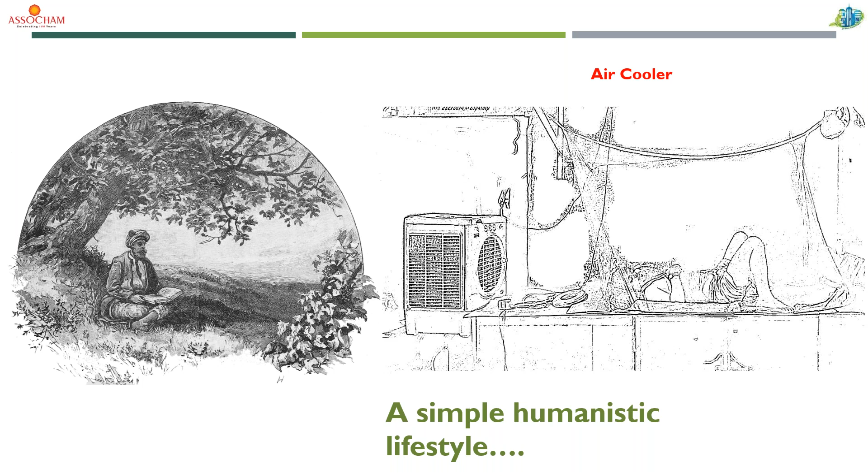We were very close to our nature. We were very close to natural things. But after that, we have now shifted to artificial air conditioners.

We have shifted to air purifiers. Nowadays, air purifiers are very common. Around 10-15 years back, we started installing water purifiers in our homes. Now we have started installing air purifiers at our home.

So this situation is very alarming. And if you talk about the air quality, I mean it was worst. And there were around 10 Indian states amongst the top 100

polluted cities in the world. The top 10 states were from India. So normally the air quality index of Delhi was around 500 plus, but now it has come down to around 50 plus or 60 plus or like that.

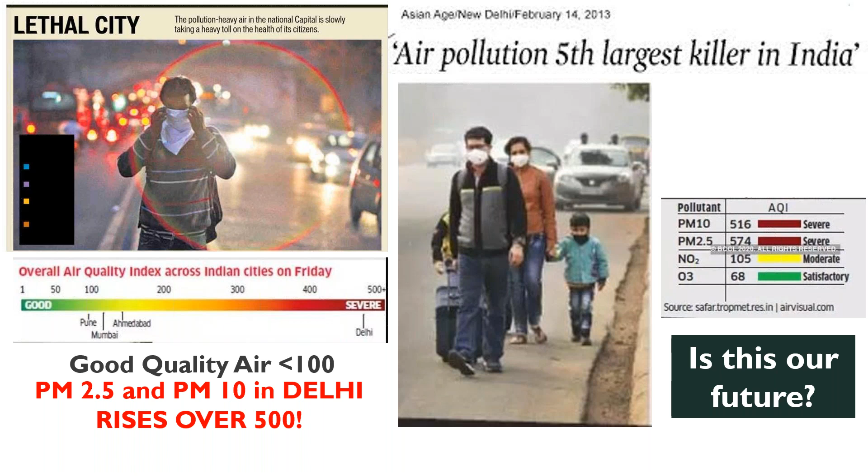The air quality has improved. This shows that air pollution was because of automobiles, construction, and pollution created by industries. Obviously the solution is not to stop industries, transportation, or construction, but to apply a better approach so that our environment is not polluted and we are not destroying our natural resources.

If you can see my screen, these are very routine images of Delhi and a city like Delhi. The roads are jammed in the morning and evening, with huge traffic jams. This is not a very good sign.

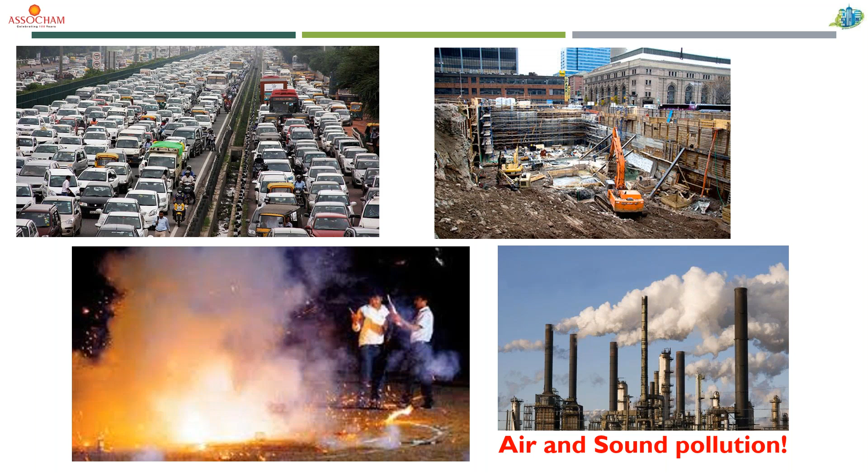You can see the pollution, water pollution - our rivers were very dirty, as I told you. But now after COVID, rivers are very clean. This shows that we were damaging our natural resources.

At ASSOCHAM, we have created this GEM Green Building Certification Program. There were already many programs running in India in the last 18-20 years, and you will be amazed to see that we could register only 6,000 buildings in that time, with around 4,000-5,000 buildings certified green. So ASSOCHAM has launched this program to support the green building movement of India, this GEM Green Building Certification Program.

This program is based upon Bureau of Energy Efficiency ECBC 2017 and National Building Code 2016.

In this GEM Green Building Certification Program, there is a scale of 0 to 135 points. If any project achieves 105 plus points, it will be GEM 5 rated. If it achieves 85 to 104 points, it will be GEM 4 rated, and similarly GEM 3, GEM 2, and GEM 1 rated. Like you have ratings for your electronic equipment, you now have ratings for your buildings also, which is GEM 1 to 5.

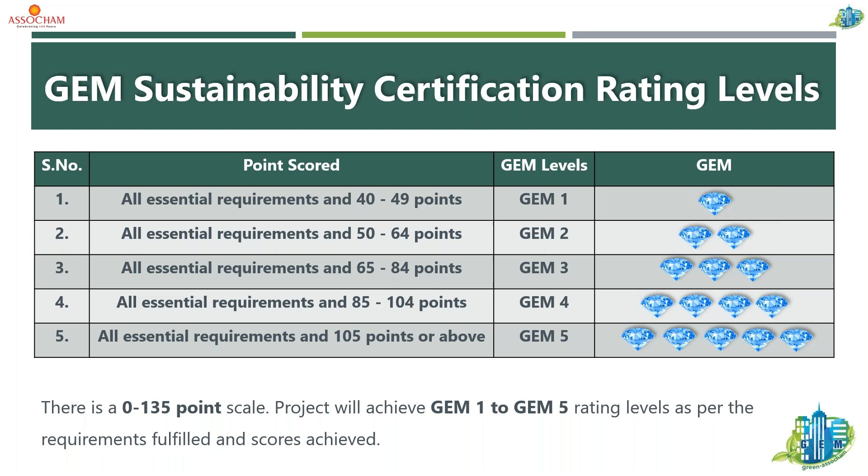This GEM Green Building Certification Program is applicable to all types of construction, all types of developments - housing, urban development, residential, commercial, hotels, factories, universities, colleges, schools and offices.

Now the question is, why GEM when there are other programs also? During this course, I would share with you some 4 or 5 technical credits, and some of you must be certified by other green building certification programs also. So I would like to share how this program has evolved in a different way, how simple it is, so that a layman can understand the green building certification program.

We have kept the fees of this program drastically less, very less, so that everybody can go for green building certification, sustainability certification, and everybody can understand what the program is.

There is a myth that green building certification ratings are very costly, and if you go for green building certification, it will cost you much. So I would like to share with you that no, green building certifications are very, very cheap.

There are many consultants, green building consultants, architects, engineers attending this program, so you can put your questions in the question column. You can see that going for green building certification costs nothing actually - the cost is even less than 4 or 5 rupees per square feet, which is negligible.

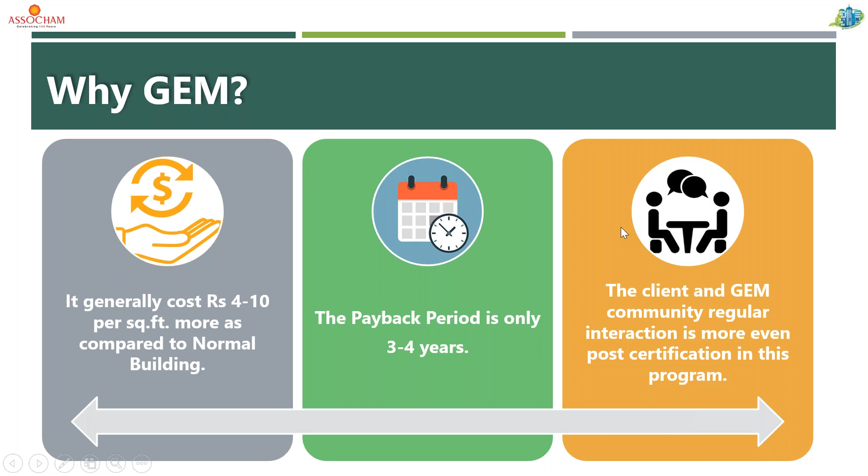One more important thing is that GEM has launched a monitoring platform. For buildings certified by GEM and by other programs also, we are installing the GEM sustainability monitoring platform, and we will monitor their air quality, electricity consumption, water consumption, and fire status online. This monitoring platform has already been launched in many of our projects across India. This is the unique feature which only the GEM Green Building Certification Program has.

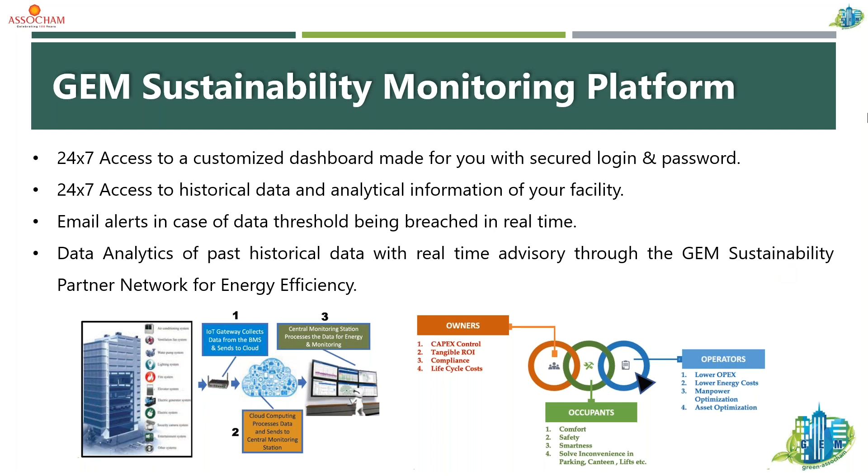Guys, we have got the support from ISHRAE, as I told you. We have got the support from Fire and Security Associations of India, from the Indoor Air Quality Association, and from the ASHRAE India chapter.

We have got support from Smart Habitat Foundation, GSES, and many other such organizations. They are supporting us in our movement, and with their help we have done approximately 35 plus green building certification projects in the last 2 years. There are 500 plus green building certified GEM professionals associated with us, along with many other professionals. I am thankful to all.

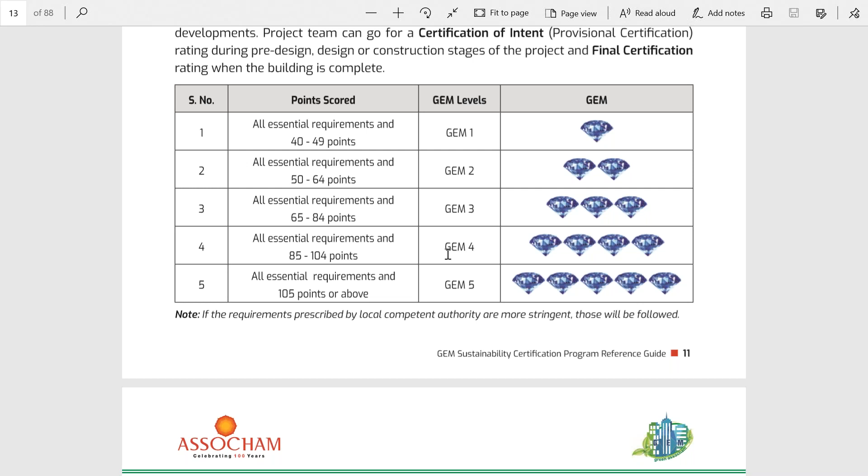Friends, I would like to share with you, as I told you, GEM is the only green building certification program which has a GEM monitoring platform with it. So we are monitoring live - the buildings rated by GEM, and also buildings rated by other programs. We are monitoring their electrical consumption, water consumption, fire and life safety status, and air quality status.

Now, I would like to share with you that GEM is the only program which has included fire and life safety in its criteria. No other programs talk about fire and life safety, but we do, because we have seen many fire incidents in many green buildings. So when we talk about energy conservation, water conservation, efficiencies, and human comfort, I think safety of life comes before energy efficiency, water efficiency, or human comfort. So we have included fire and life safety also in the sustainable buildings.

We have also included passive design strategies in our program. Why? Because if a building is properly designed and designed in an efficient way, we can reduce the consumption of electricity, lighting, and water by 30 to 40%. So it is always good to design a good building, a best building. Passive design architecture plays a very important role, and so do the architects. So we have included passive design strategies also in our program.

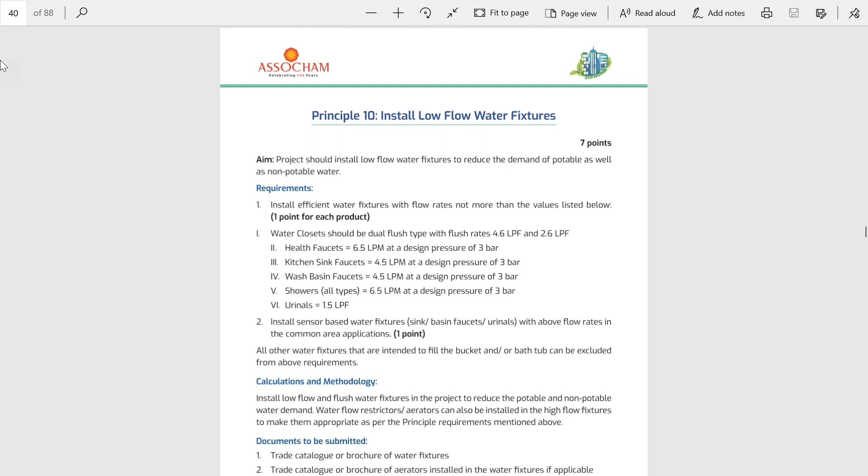Now I would like to explain the difference, how simple we have designed this program. Guys, you must know that if we want to reduce potable water consumption, we have to install low flow water fixtures. So what we have done is awarded buildings points on the basis that if they install low flow water fixtures, we are allowing them the points. There is no need to do any kind of calculation. You need not perform any calculation to show the water saving. If you are installing low flow water fixtures, you are saving water. So there is no need for calculation, and we will award 1 point for every installation.

Say if you are installing health faucet, low flow kitchen faucets, wash basin faucet, shower and urinals, you will be awarded 1 point each. And if you are installing sensor based water fixtures, you will be given 1 more point. So if you are installing low flow water fixtures, you will be awarded points. You will just have to share the water bills, fixture purchase bills, and show the photographs. That's it. There is no need to do any calculation or saving calculation on the calculator, because what we understand is worthless.

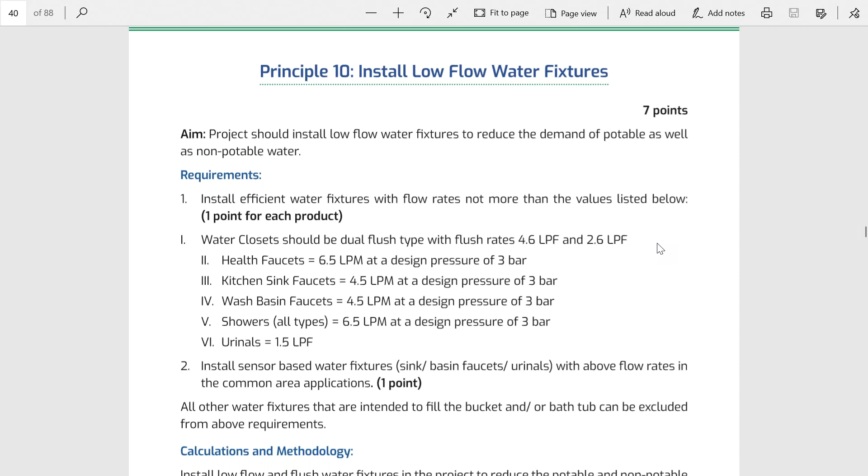Similarly, I will take you to the next point. I hope you all are getting this. You will be allowed to ask questions at the end, or you can send your questions through email also. Now we are moving to our next principle, which is again very important, and what GEM has done to improve this principle.

I am waiting for the screen to come to you. I think now you can see the next screen, which is principle 11, on-site treatment of grey and black water, reuse for flushing.

Friends, you all know that some grey water and some black water comes out from our toilets and kitchens as well. And for a building to save water, we recommend installing sewage treatment plants. And if it is industry, we recommend installing ETPs to treat the water. Then this treated water is reused for flushing, landscaping, car wash, cleaning and all.

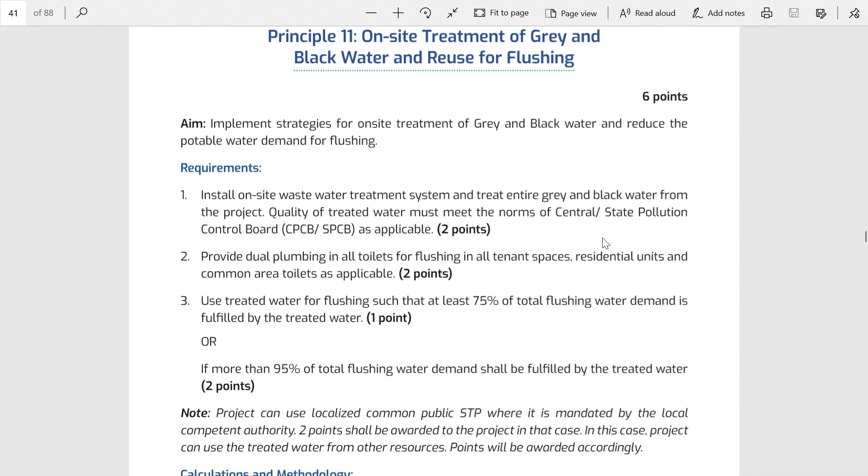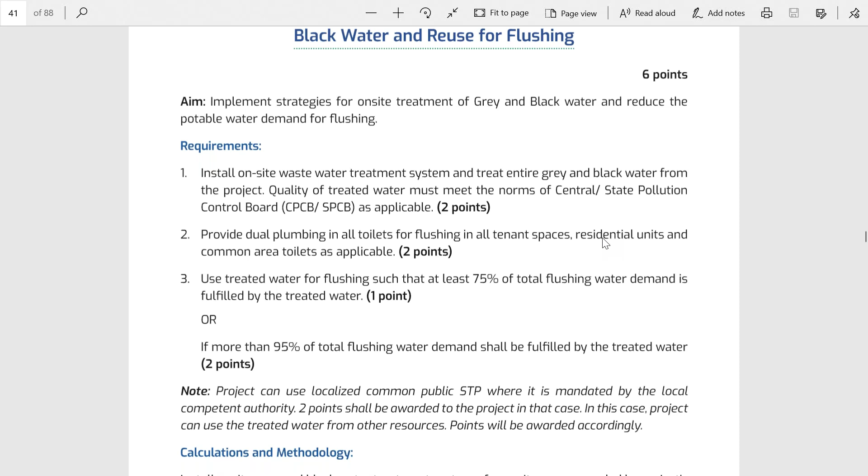We also award points for installing STPs, installing dual plumbing in the toilets, using the treated water for flushing. That's great. But the major change is, I am highlighting this on my screen, and you can see in a couple of minutes. If you read the highlighted section, you can see that if you talk about industrial areas, there are many industrial areas where the size of the industries and the plots are very small.

In such plots, the industries are not supposed to install their individual STPs. In that case, the government prepares an STP for them in a common area, and the discharge from all the facilities comes to that common STP. So if such is the case, ASSOCHAM GEM awards 2 points to the industries if they do not have space to install the STP, or they are not supposed to install the STP by the local authorities. If they are supplying their sewage waste to the common STP installed by government, and they can confirm this, we will award them the points.

This is again a major change in the green building certification programs, because earlier many industries were struggling as they were not allowed to achieve points. If this was the case, they were forced to install the STP in their own boundary only. But we have allowed them - if they are using a common STP, we will be awarding them the points.

Now I would like to take you to the next principle, which is principle 14. Just a minute. See, this is post-occupancy waste management. I am waiting for the screen to come.

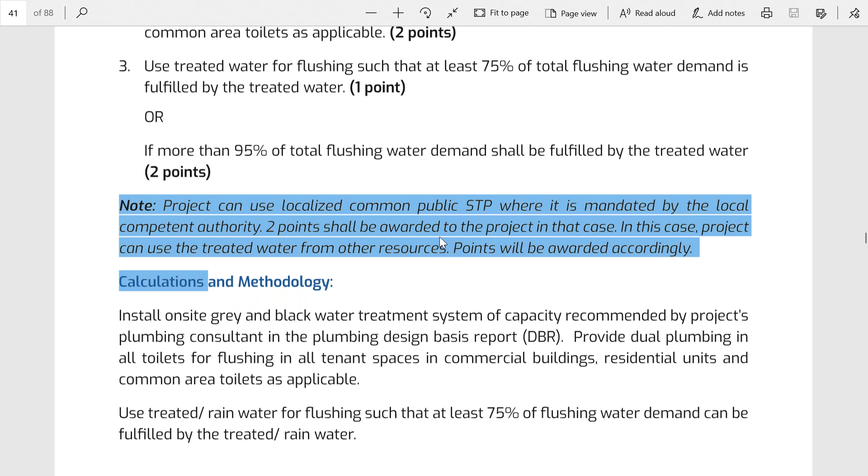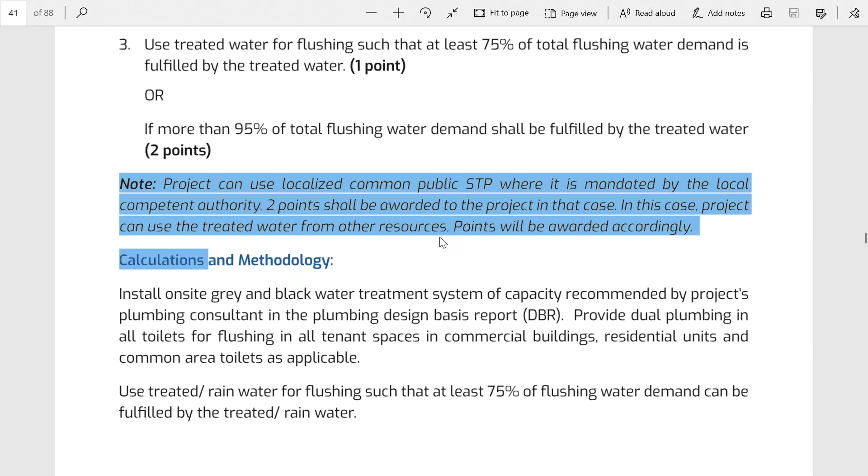And if you provide a central waste collection area, central waste collection bins, it awards you again 2 points.

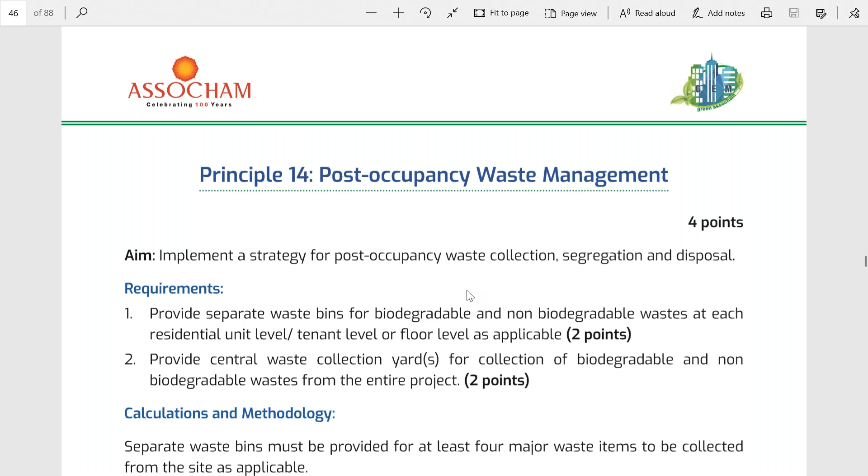The difference is, you know, the major challenge when you have to do the sizing of the waste bins. As you can see, the projects are providing the waste bins, they are segregating the waste, they have provided the common area, but the major challenge is what should be the size of the waste bin.

So we have given a criteria which is given in NBC 2016. Friends, I have already told you that the major pleasure of this green building certification program, GEM, is that it follows local guidelines.

It follows NBC 2016 and it follows ECBC 2017. So GEM is the only program which is based upon Indian National Building Codes and Indian Energy Conservation Building Codes. This is the only program.

If you follow NBC and ECBC, it tells you everything. So in our program also, while calculating the waste, you are supposed to follow NBC guidelines, which say that if you want to estimate the sizing of the waste bins,

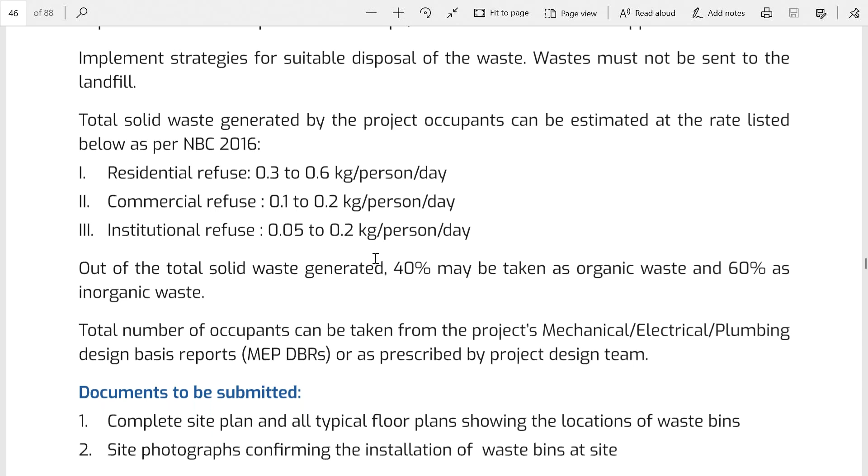So we have simplified this, how you can calculate this. And also, guys, I am highlighting one line here, which you can see in a couple of minutes.

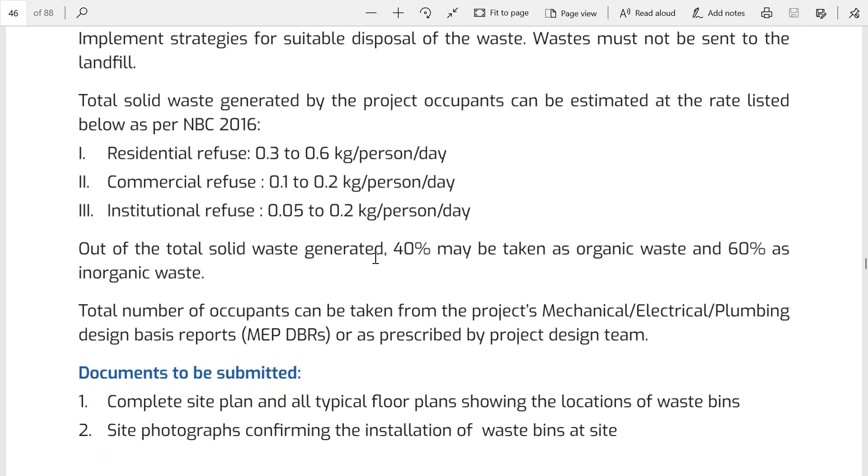See, many of you are already doing green building certifications, many of you are already certified. You must be facing one problem, that whatever you explain in your green building certification programs is entirely different from what is written in the MEP DBRs. I'm sure you all must know what MEP DBRs are.

MEP DBRs are basically the mechanical, electrical, and plumbing design basis reports, which every project team has while they are constructing their projects.

So see, guys, I have done around 250 green building certification projects in India and abroad, and I must share with you that in all the projects there is a huge difference between the green building certification reports and the MEP design reports, because they do not match each other.

But for now, what we are saying is, we recommend that you should follow MEP design basis reports. You must review the MEP design basis reports, and your green building certification reports must match, must follow your MEP design basis reports. So you can take all the parameters from your MEP reports, which are wonderfully designed by our MEP engineers.

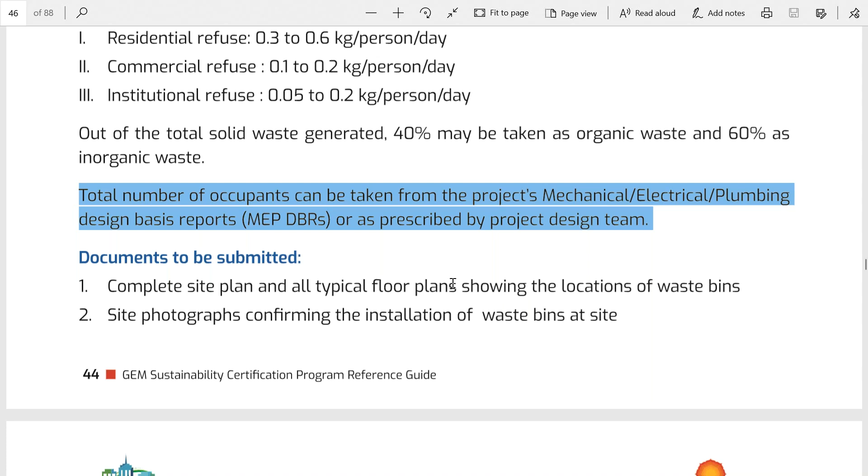Similarly, principle 15 says the on-site conversion of organic waste. You will see the slide in a couple of minutes.

I am taking some important principles and discussing them with you. Otherwise, we normally conduct around 2 days of training for explaining all these features, which is not possible now. So we are trying to discuss many of the technical principles with you within this time span.

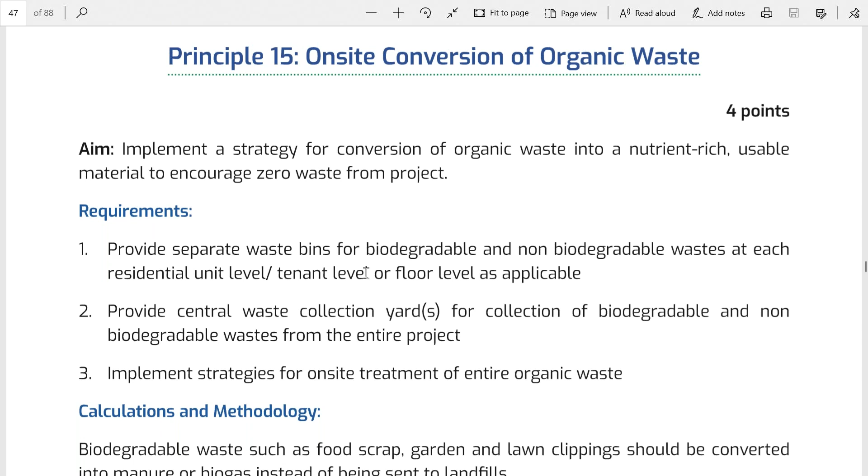So similarly, when you have segregated and stored the organic waste, you can install on-site waste treatment plants, like OWC, or go with vermicomposting. I'm highlighting the point that you can install vermicompost, organic waste converter, biogas plants. If you do so, you will get around 4 points under this principle.

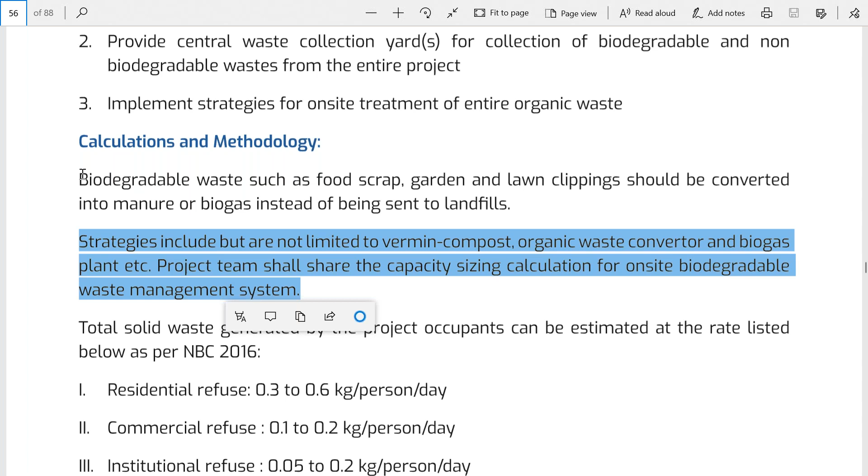Similarly, guys, I would like to discuss with you one very important principle, which is always a very painful point of calculation for the green building consultants. This is building construction materials.

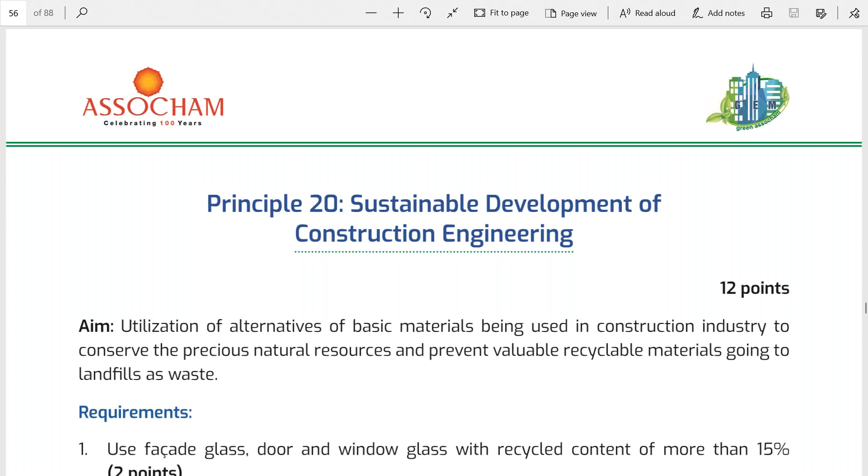I'm hopeful that you can now see principle 20, sustainable development of construction engineering. Yes sir. Good, Kishan.

The green building consultants amongst us can understand the pain of how difficult it is when you are told to meet the criteria of 20%, 10% recycled content, regional content out of the BOQ, civil BOQ. Because many times this civil BOQ is not given to us. Many times when the civil BOQ is given, the costs are not correct. And ultimately, when everything is given to us, our criteria is not meeting.

So we will not achieve, we cannot achieve 10%, 20% regional and recycled criteria. But to make it straightforward, what we have done is, like we did in water fixtures, we are awarding you the points if you are using the right material. If you are using the recycled material, if you are using the regional materials, we are awarding you the direct points. There is no need to do any kind of calculation. There is no bulky calculators.

There is no calculator available. You are not supposed to do calculation on paper. That's it, that is our target.

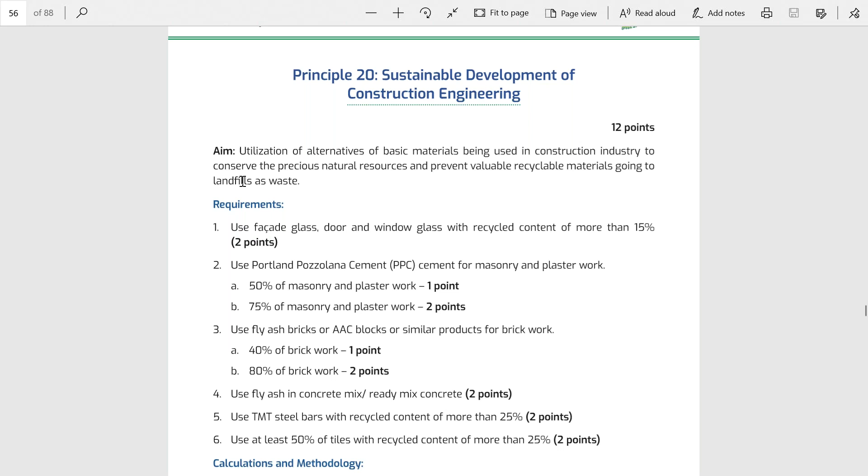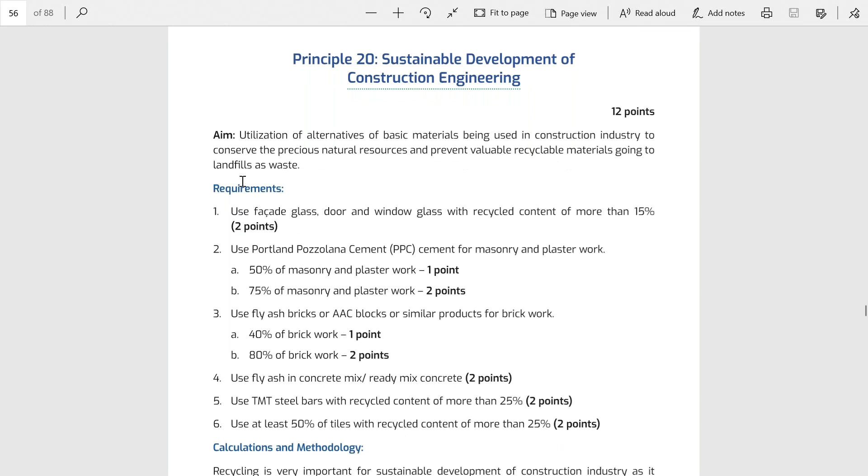So if you talk about the recycled material, you can see here that if you use recycled facade glass, we are awarding you 2 points. If you are using PPC cement for 50% or 75% of your plaster work, we are awarding you 2 points. If you are using fly ash or AAC blocks for the brickwork, we are awarding you 1 or 2 points. Similarly, if you are using fly ash in your RMC, we are awarding you 2 points. If you are using TMT steel bars, we are awarding you 2 points, and like that.

So there is no need to do any calculation. When you are using these materials, it means you are sustainable and you are trying to save our natural resources. So there is no point of doing any calculation, any false calculation. You just have to submit the bill that you are using it, and submit the photographs that you are using it, and we will award you the point.

Because many times what happens is the projects are not following the criteria, but they are good at calculation. So they are not following it, but they prove it on calculators. They submit the report, and we have to award them the rating. So for now, what we have done is we have removed this calculation and we are awarding the points straightforward. When you are applying the material, you will get the point.

If you are not applying the material, you will not get the point. There is no point of doing so many calculations. It will save your time also. Similarly, for the local sourcing of construction materials, we are awarding you 6 points.

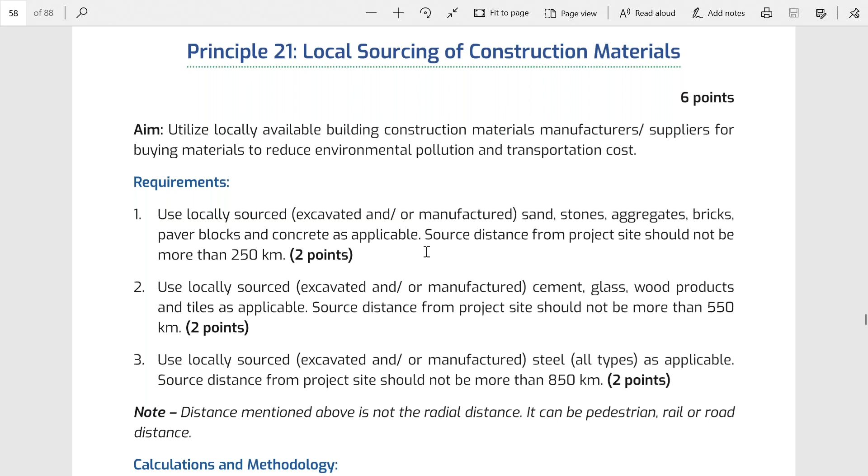So there are 3 types of materials. Say the materials like sand, stone, aggregate, bricks - these are available locally within a range of 100 kilometers or so, so we will award you 2 points. There are some materials like cement, glass, wood products that are available within say 400, 500 kilometers. We will award you 2 more points.

And the material like steel, which is not locally available, so we will award you the points if you source the steel, if you purchase the steel which is manufactured within 850 kilometers. And this range is not the radius, because we are not going to fly and bring the steel from the manufacturing plants. It will come by road, it will come by rail network. So this distance is road distance, not the fly distance, which is again a manipulation point.

So this is the road distance, 250 kilometers, 550 kilometers, 850 kilometers. We have clearly mentioned here that the distance mentioned above is not the radial distance. It can be pedestrian, rail, or road distance. There is no meaning of talking radial distance in these criteria, which we have been following for so many years.

So we have changed this also. And we have got very positive response from the architects, from the green building consultants, from the builders, developers on this change. They are appreciating these changes. And that's why they are accepting it so quickly.

Now I would like to take you to the next criteria, which we have worked on too much, and we have tried to change this criteria entirely.

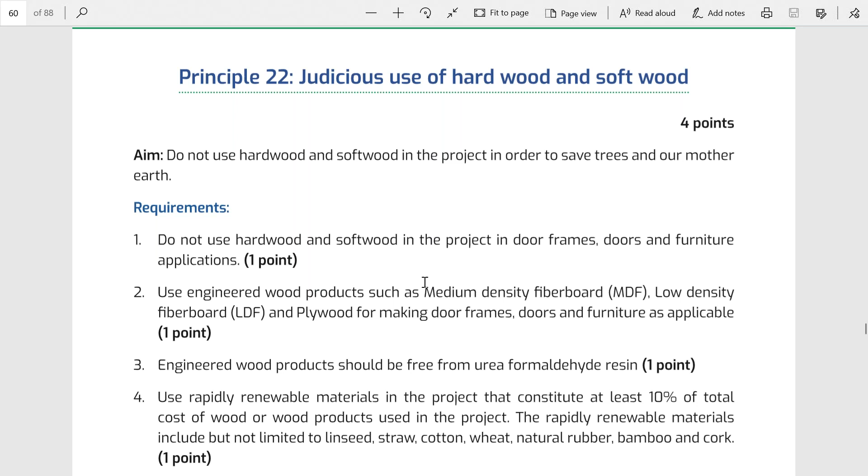In many of our green building certification programs, we are told, or in fact we are forced to use FSC certified wood, if we want to get the points, if we want to get the points... just a minute.

If we are using FSC certified wood, we will be awarded 4 points. If we do not use FSC certified wood, we will not be awarded the points. So in that case, we were forced to use certified wood. This should not be done.

So what we have done is we have removed this criteria, and we have specifically mentioned that use of wood, whether hard or soft, is not allowed in green building certification projects. If you are using softwood or hardwood, you will not be awarded any green building rating or points. There is no meaning of using certified woods.

So we have removed this criteria and principle, and told that if you are not using hardwood or softwood, you will be awarded 1 point. And if you are using engineered wood, meaning boards, fiber board, or plywood, you will be given 1 point, because engineered woods are recycled woods basically. So if you are not using wood, and instead using engineered wood, you will be allowed 2 to 3 points. And the wood should be urea formaldehyde free.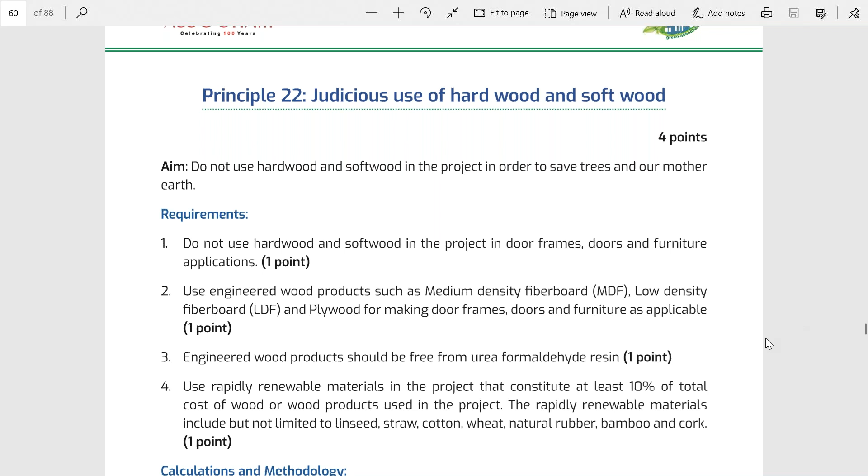Now there is one more credit which I would like to share with you, which is principle number 25. I think you're not getting bored. Now I would like to discuss with you principle number 25, which is use of imperishable energy resources, because this principle talks about the use of solar, wind, and such renewable resources.

So guys, with the experience of industries, we can see that we can install 5%, 10%, 15%, 20%, up to 25% on-site solar of their contract demand, and we will be awarded with 1, 2, 3, 4, or 5 points. With our experience, I can assure you that if somebody achieves 25% of their contract demand, that is a very appreciable step. So we have changed this criteria and started it from 5, 10, 15, 20, and 25, because we want to encourage builders, developers, and industrialists to install solar or renewable energy resources, and that's why we have kept a very long range.

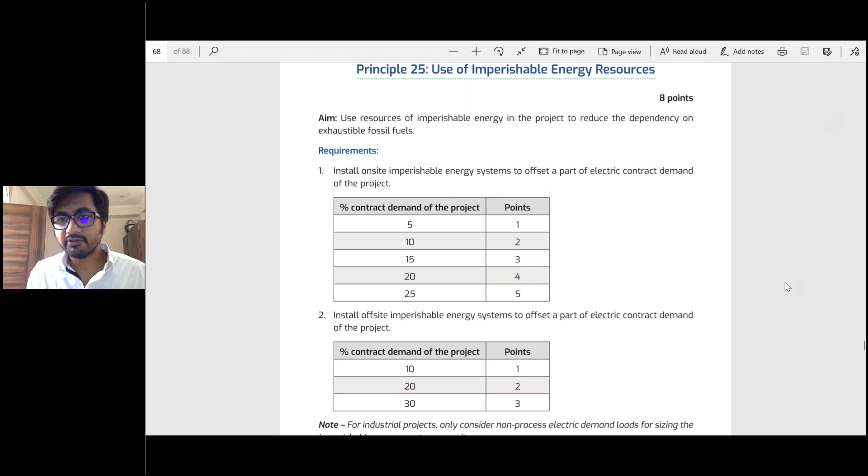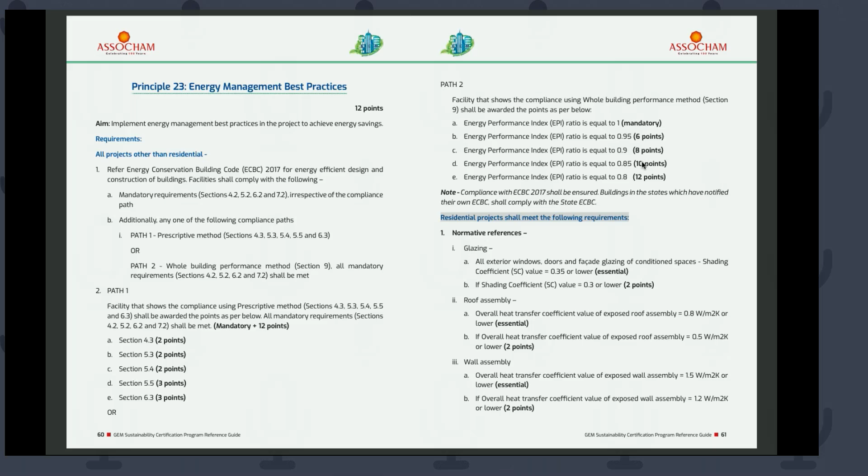Yes, thank you Mr. Harinder. I hope my screen is visible. Yeah, it's visible now, thank you so much. So we have around 15-20 minutes to cover this energy section, fresh air and daylight section. This will also include the ECBC section, because ECBC is linked with energy and daylight as well.

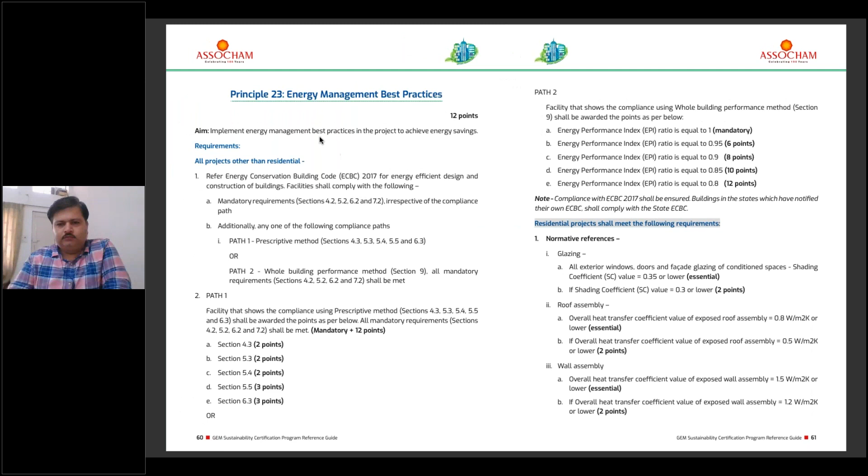So coming to principle number 23, that is energy management best practices. The aim is basically to save energy. Now how to save the energy? Coming to that point, give me a minute, I'm opening the slide.

So the requirement is basically to comply with the mandatory requirement of ECBC. If we go with the first statement, comply with ECBC 2017, here the latest version of ECBC is applicable, not the earlier version which was ECBC 2007. So we need to make sure we are complying with ECBC 2017. There are 4 sections: 4.2, 5.2, 6.2, 7.2.

The persons who have gone through ECBC earlier must be aware what 4.2, 5th, 6th and 7th sections are. For new people who are not aware about ECBC, I'd like to brief you about these sections. Section 4 is all about envelope. Section 5 is all about comfort system, which includes air conditioning systems. Section 6 will be for lighting system, lighting power density and lighting efficiencies. The last section, 7.2, is all about electric power equipments and renewable sources.

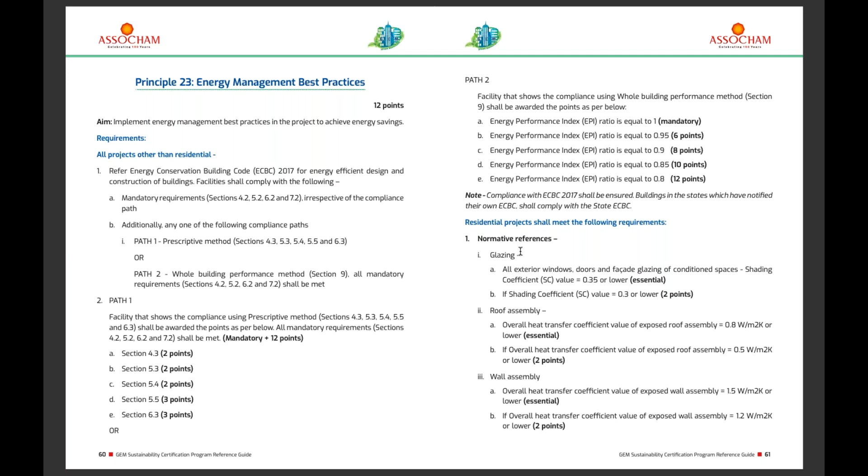So these guidelines and requirements were for non-residential buildings. For residential buildings, ECBC is not coming into picture, because the rating system for residential by BEE has been launched, and they are trying to implement it through notification in the states. So for commercial buildings, you have to comply with ECBC. For residential buildings, I will show you in the next slide.

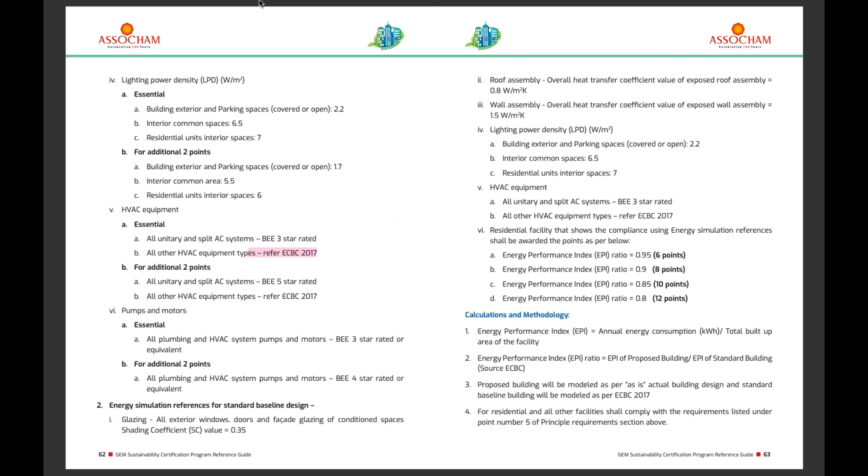I will show you the ECBC guideline here. So how will you get the ECBC 2017 book? I am showing it here. You search ECBC 2017 PDF, you will be able to see the BEE website, and once you click on it, you will get the PDF. I'm opening the PDF as I have already downloaded it.

So this is the ECBC 2017 book, and if we see here, sections 1, 2, 3 are given for the basic definitions and about what the buildings are, what the prescriptive and mandatory requirements are. You can see this in section 3 as well. Coming to sections, section number 4, that is building envelope. I'm coming to section number 4 directly.

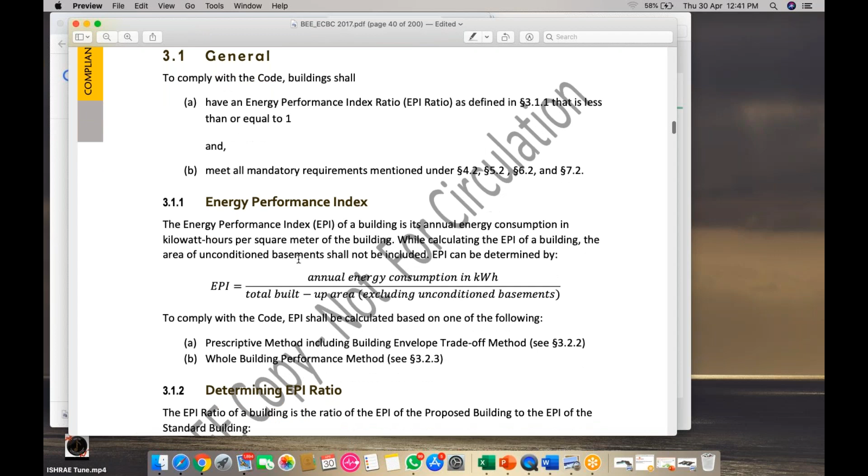So here you can see what the EPI ratio is - EPI of proposed building and EPI of standard building. EPI is basically energy consumption divided by your square foot area or square meter area. So you will get the EPI, energy performance index. That energy performance index, if you divide it by the standard building, you will get the EPI ratio.

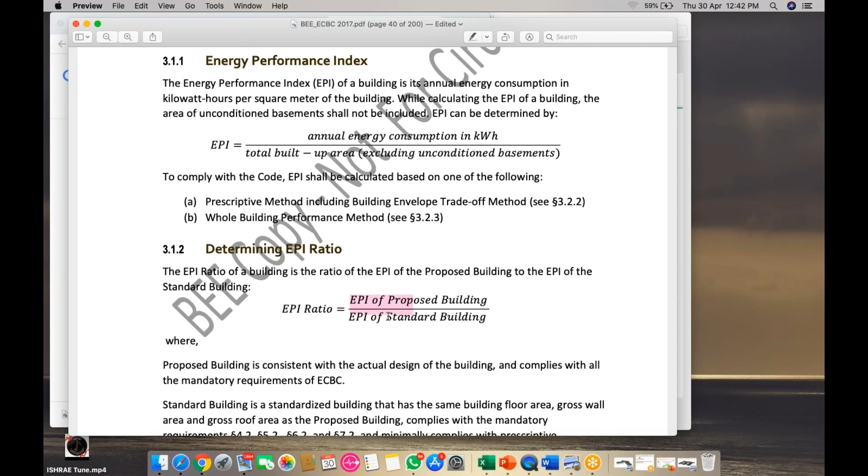So this is the building envelope part. In building envelope, a few parts are coming like wall, facade wall, roof, and glass - that fenestration.

Coming to that point, fenestration - these 4.2 parts are the mandatory parts. Here you will see all 4.2, 5.2, 6.2, 7.2 - these are mandatory provisions.

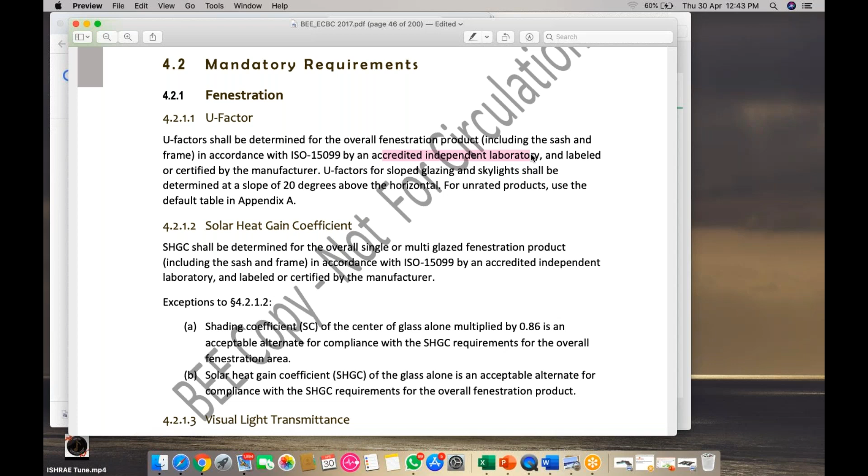So here the U factor of the glass should be as per ISO 15099 and it should be tested from an independent laboratory. The manufacturer will give a certificate that this is certified as per ISO 15099. What the actual values are is not required here because that will come into the 4.3 part.

Similarly, visual light transmittance should also be as per ISO 15099.

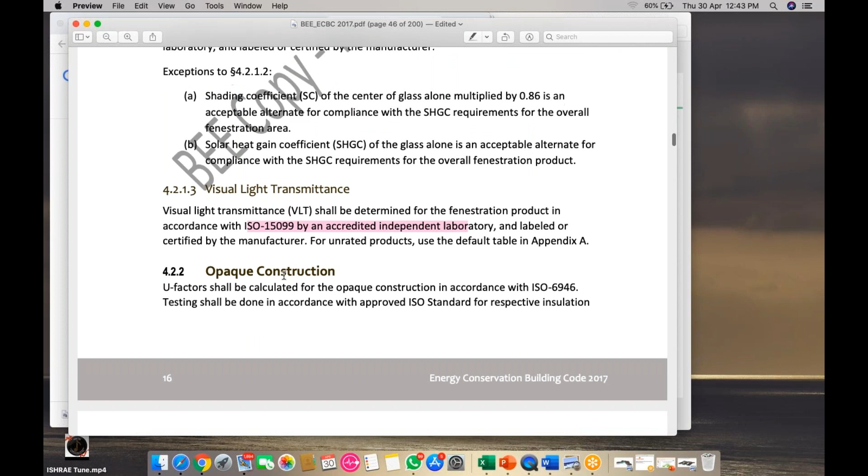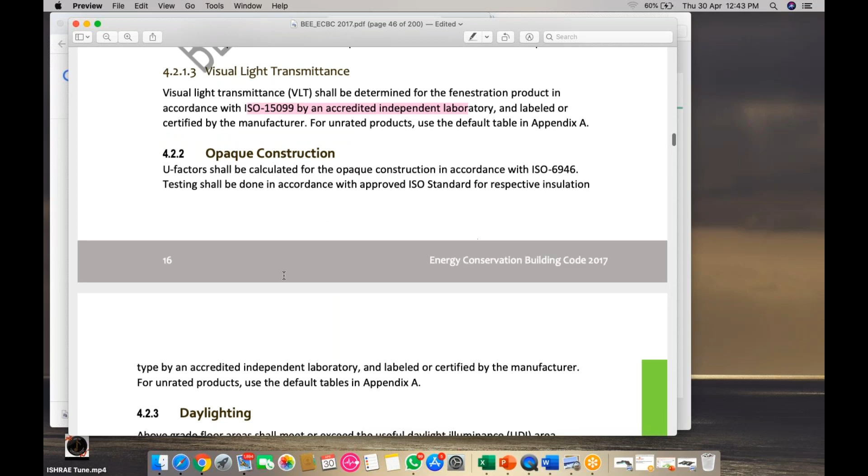Coming to daylight, this is also one of the mandatory parts. This is one calculation - I will show you briefly how the daylight extent factor can be considered here. Daylight is basically 90% of the potential daylight hours in a year, and it should be uniformly distributed.

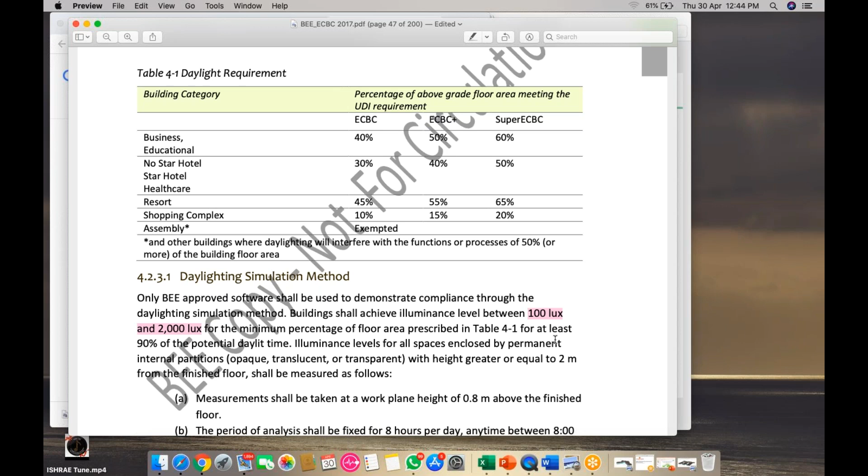So how can I do it? I can do it by two methods. One is the simulation method - it will help you identify how many hours the area is complying with the lux level between 100 lux and 2000 lux. There is also a prescriptive method, because nowadays people are not aware about the software, so you can do the manual calculation as well.

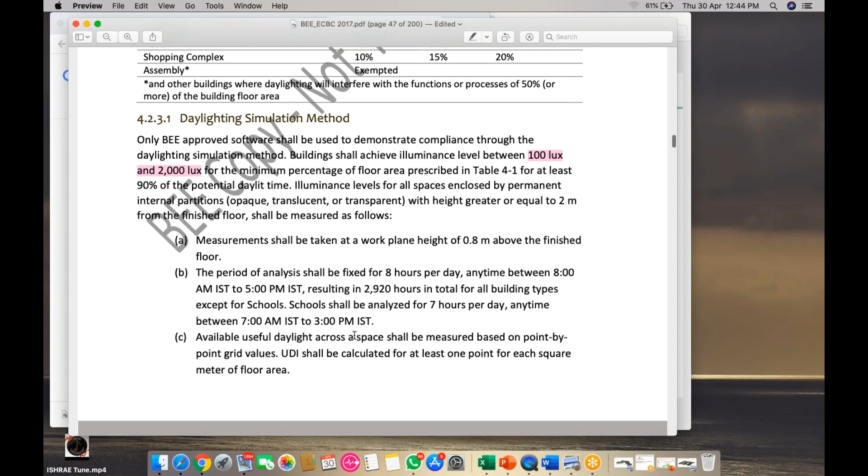So how does the manual calculation work? You have to first check the projection factor. What is projection factor? It's your depth of overhang divided by your height of the window.

Your location will define your latitude - it could be more than 15 degrees north or less than 15 degrees north. Once you've decided, let's say you're coming to greater than 15 degrees north, then you have to find whether your glass has more than 30% VLT or less than 30% VLT.

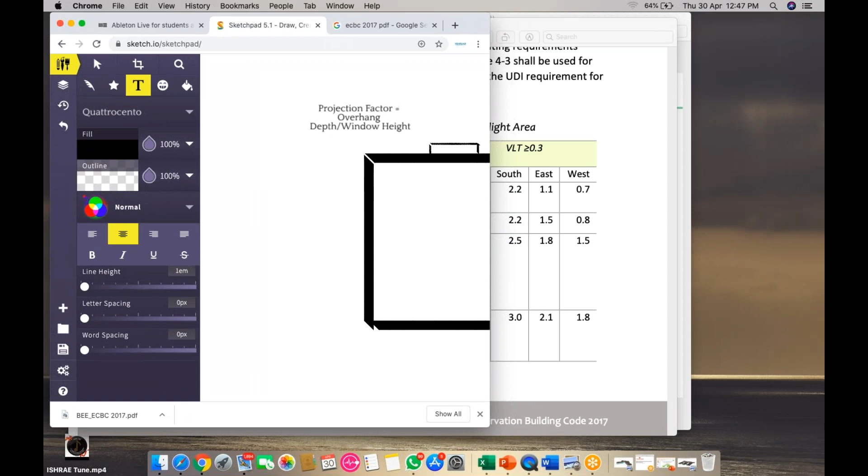I will check DEF from the book. Let's say my window has a projection factor of less than 0.4, and my location is in Jaipur, let's say 15 degrees north, and it is north facing - 2.5. So my DEF will be 0.25 or 2.5. So how will I use this 2.5?

So, A is equal to DEF multiplied by window head height. This is my first formula.

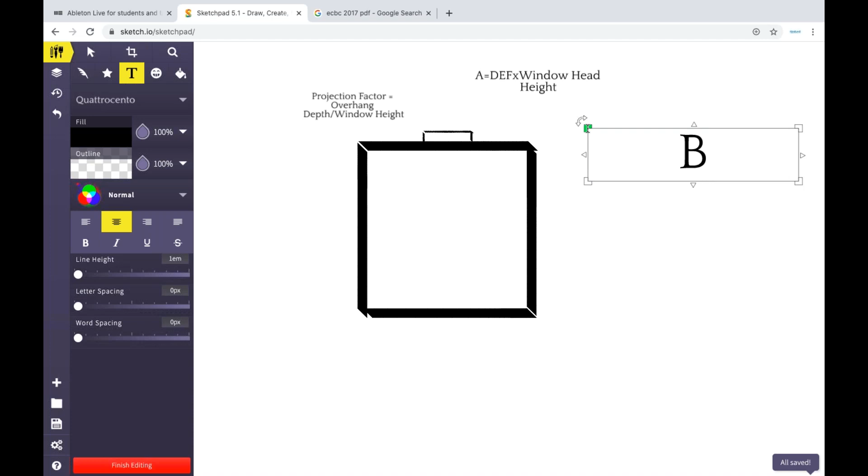And for the second part, my B part would be using DEF - we have taken 2.5 from that book, and the formula for B is equal to W plus 1 plus 1.

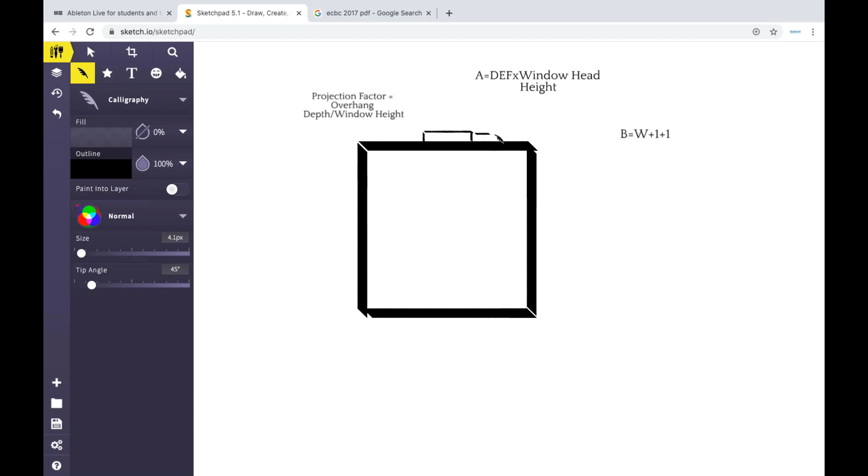Now try to understand this - this is my window and the width is the window's width, this is my W. Along with this, I have to take 1 meter on this side and 1 meter on this side. So this is my 1 plus 1. I have selected my boundary of area - right, so this is my boundary of the area.

In case your room is so small that you're not able to take this 1 meter, then it should be 0.7, 0.5, whatever distance you have - take that distance. In case there are multiple windows, two windows, then you have to take half of the distance between one window and the second window. Now you have defined this horizontal plane, but you haven't decided the vertical area.

So this A is equal to DEF into window height. Whatever the value will be, it will give you the boundary here. So now this is your daylight area.

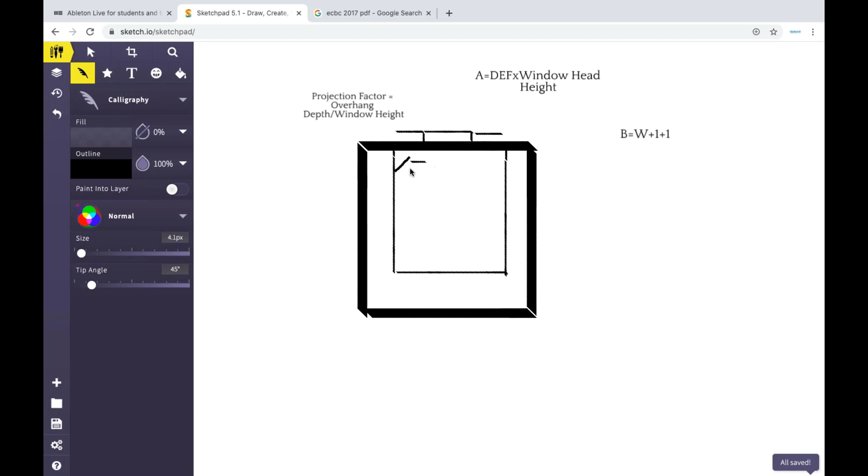So this is your daylight area. This is how you can calculate the daylight area through DEF calculation. I hope this will be clear.

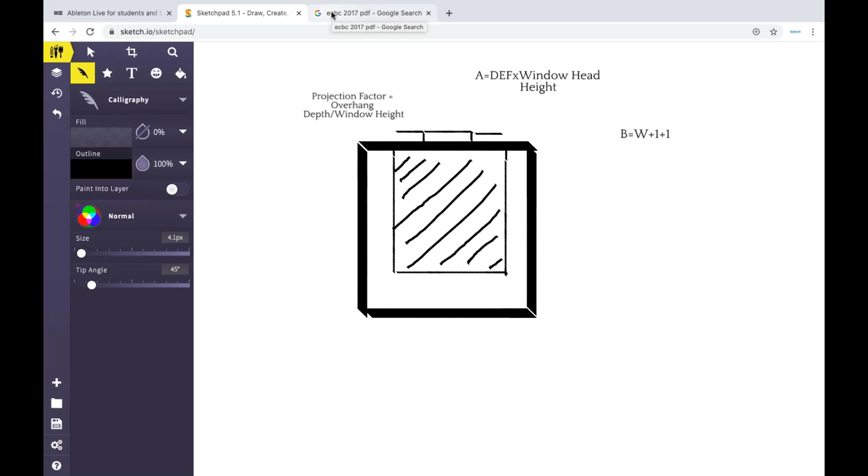This is how you can also go with the simulation softwares, and that will be much helpful in case you are very well versed about software. The requirement of software are mentioned in the ECBC book, which softwares are verified by BEE, because BEE only accepts a few of the softwares which we can go ahead with. On the last page of the book, we can refer to that.

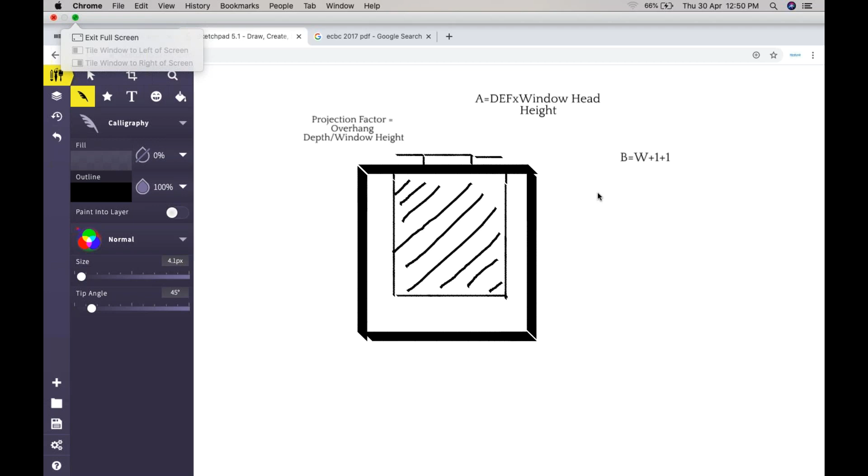So this area will be total area. We can say total area will be daylight area, which is equal to A into B. So this is my daylight area. This is your calculation.

Coming to the next slide.

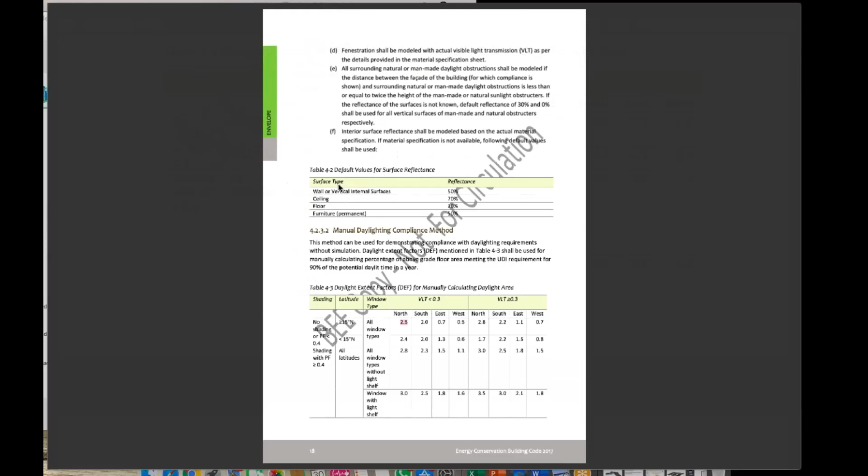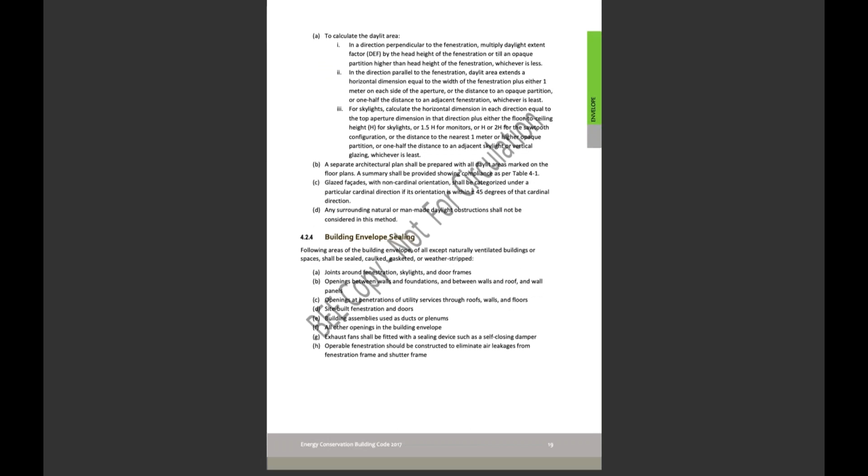This 4.2.4 is all about building envelope sealing. You have to ensure that the building envelope sealing is there in the building. These are examples. Moving ahead, you can see now prescriptive requirements.

These are not mandatory requirements, but for the compliance of ECBC, you have to either go with the prescriptive method, these values, or the energy simulation method. In the case I'm going through this prescriptive method and not the energy simulation part, then I will see that roof U value is the overall heat gain coefficient, overall heat transfer coefficient.

This overall heat transfer coefficient is for all buildings except schools and hospitality, for composite climate, hot and dry climate, warm and humid, temperate, and cold. In India, there are 5 types of climate zones. These are divided into 5 parts, and you can select accordingly.

Let's say I'm taking Jaipur. Jaipur comes under composite climate zone, and 0.33 is my maximum threshold. I have to construct and design a building which will have a U value of less than 0.33.

In that case, that is my office. How can I reduce it down? By using insulation, by using more aerated material, because air is also insulation. That will help us reduce down the overall heat transfer coefficient of any surface.

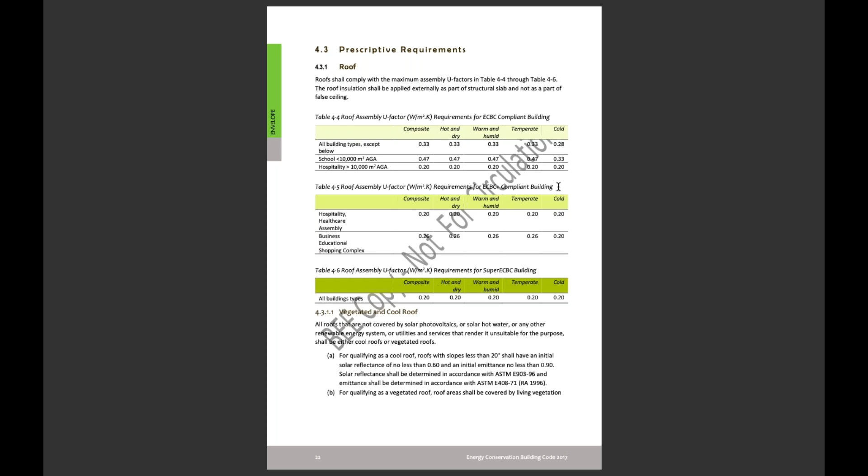ECBC plus is also there, but we are not focusing on this thing because this is advanced level energy efficiency, so we are not focusing on that. We are only focusing on ECBC values, not ECBC plus, nor super ECBC.

Similarly, glass has 2 properties, not only U factor, but also the solar heat gain coefficient. I am selecting this here, so you can select it. Maximum U value is 3, and SHGC is 0.27.

We have limited time, but I'm just going through overall, basic things. It will be helpful for you to go through in detail and understand ECBC. Otherwise, ECBC is quite intensive, needing intensive training of 1 day, 2 day, 3 day, and we have limited time, so I'm going through quickly.

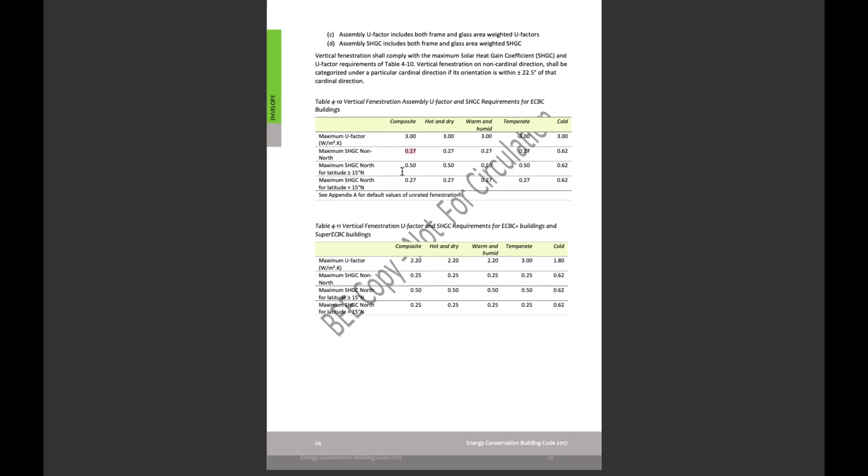Similarly, in case you have overhangs, note it down here. Let's say my glass is having a 0.3 SHGC. Can I comply with the prescriptive requirement? As from this table, you cannot comply.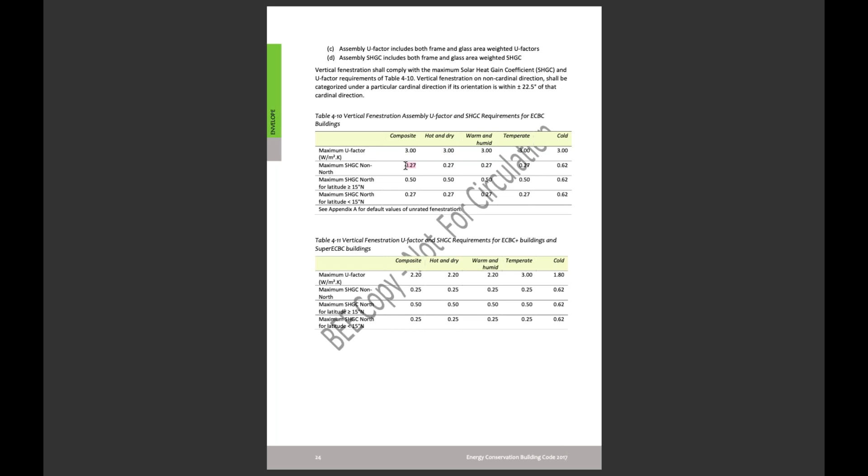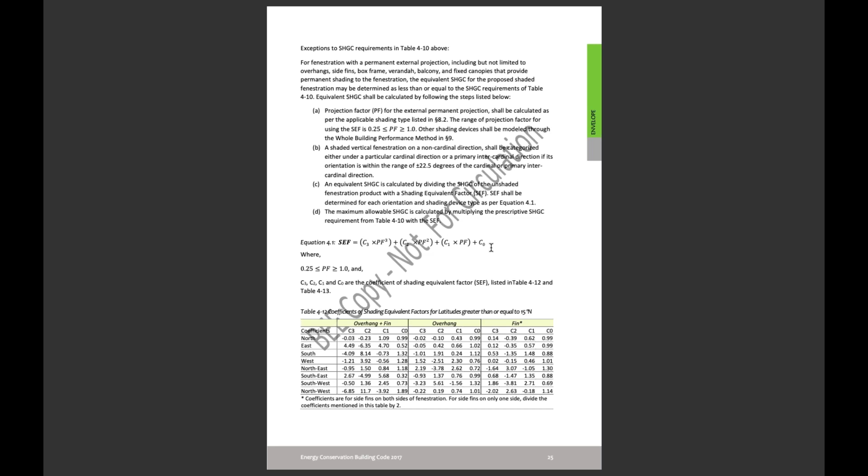But in case you are providing overhangs, then it could be possible that the 0.27 limitation written in the ECBC can increase a bit. How much it will increase, you have to do calculation of SEF. This is again a bit detailed calculation, but due to the time constraint, we will be taking it up in the next session whenever it will be conducted.

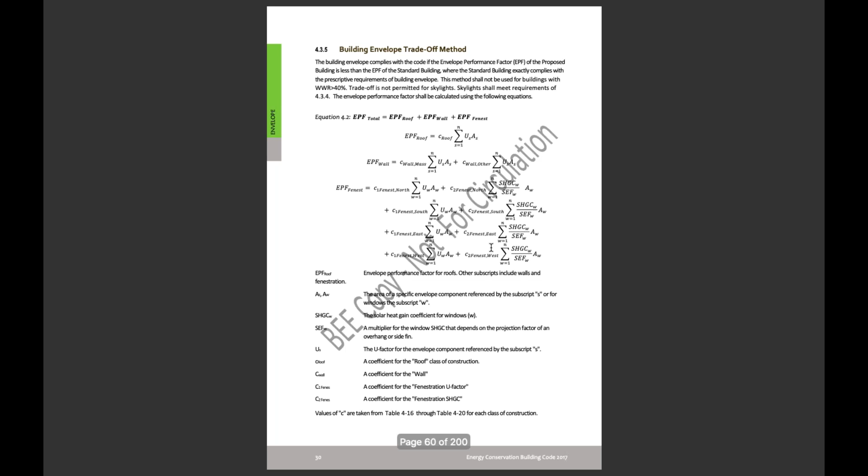The things which are more important for your examination, GEM-CP, that I'm going through with you as of now - this is a quite detailed book, but basic things you can read and apply for the GEM examination.

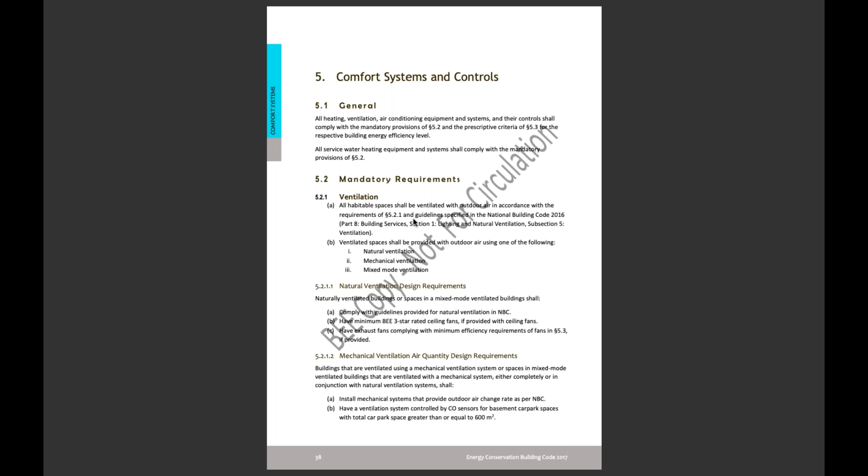Coming to comfort system, the mandatory requirements are, one is ventilation. Now ventilation could be either natural ventilation or mechanical ventilation. Mechanical ventilation requires a machine that will throw the air from building outside to the building, or we can say the fresh air being injected in the building - that's basically mechanical ventilation. But in case if no machines or fans are used, it will be natural ventilation. So ventilation you have to comply with.

Next is energy efficiency of the chillers, that you have to comply. So these are the COPs mentioned over there. You have to comply with these COPs.

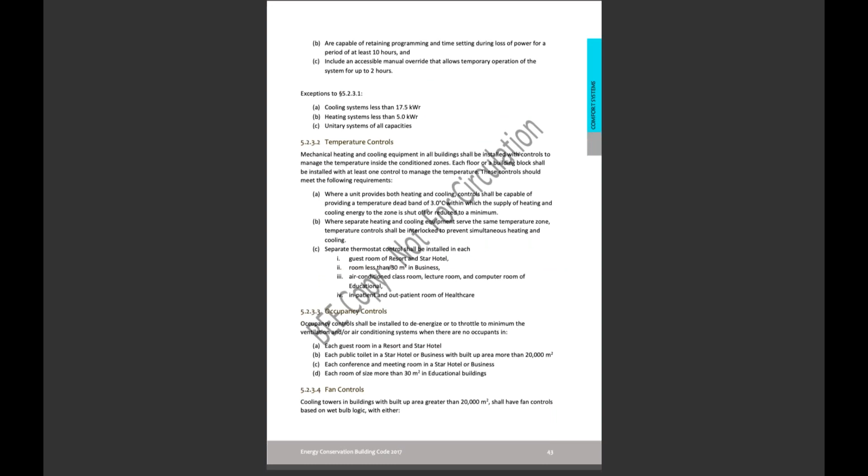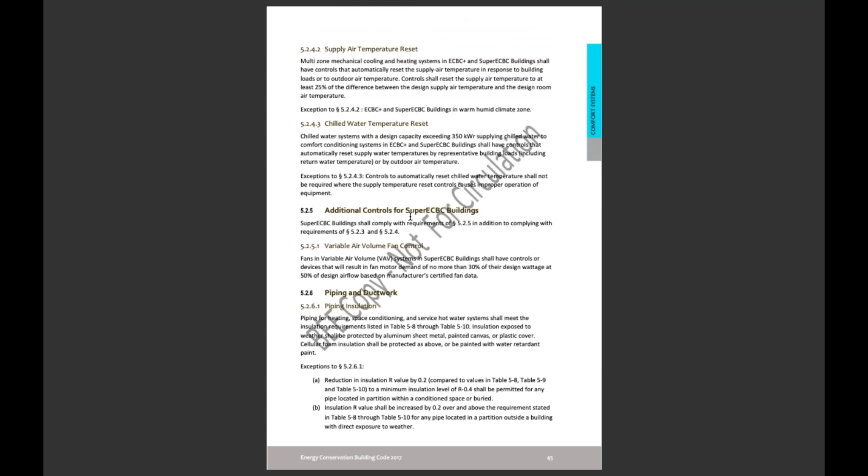Coming to next, control system - how the control system will work, these are there. Additional controls are there which are mentioned over here. This section 5.2.4, 5.2.4.3, you can refer these. So all these things you can refer from the book.

Now we have a time limitation. The service hot water system is also there. You can comply with this requirement.

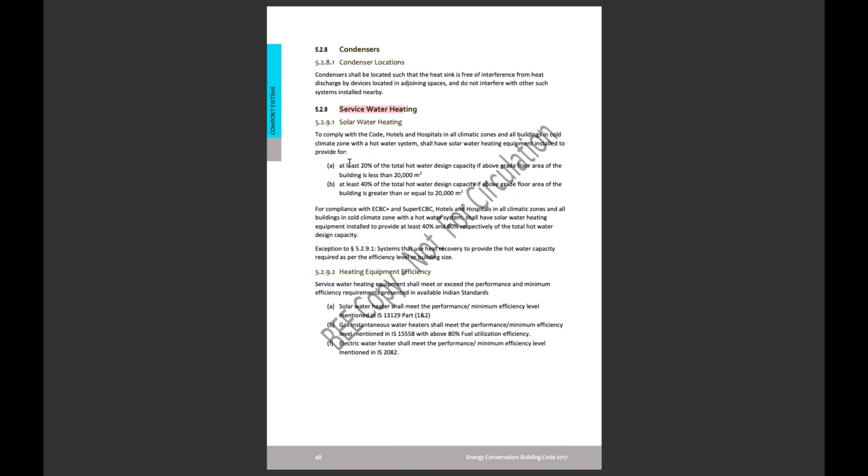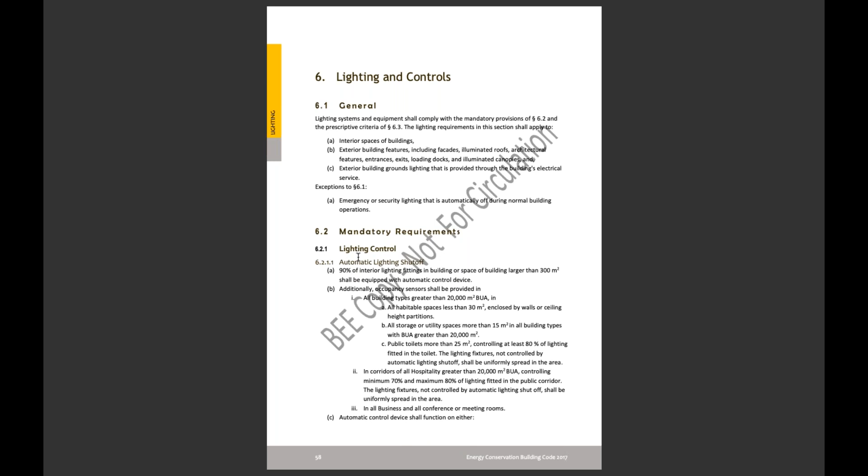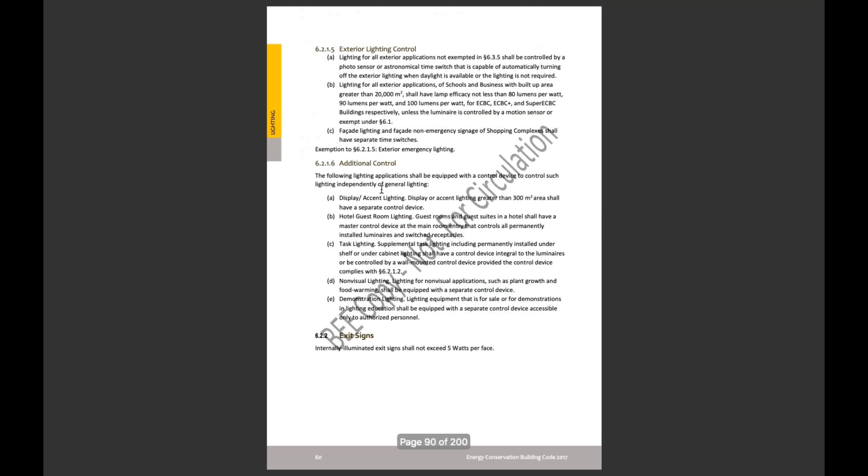Similarly, coming to next section, that is for lighting part. This lighting control also you can see from here. I'm not going into detail, we have time limitation. Space control you can check, daylight area controls you can check, and lighting power densities - that is in prescriptive method. So lighting power densities comes under prescriptive method. These things you can go through.

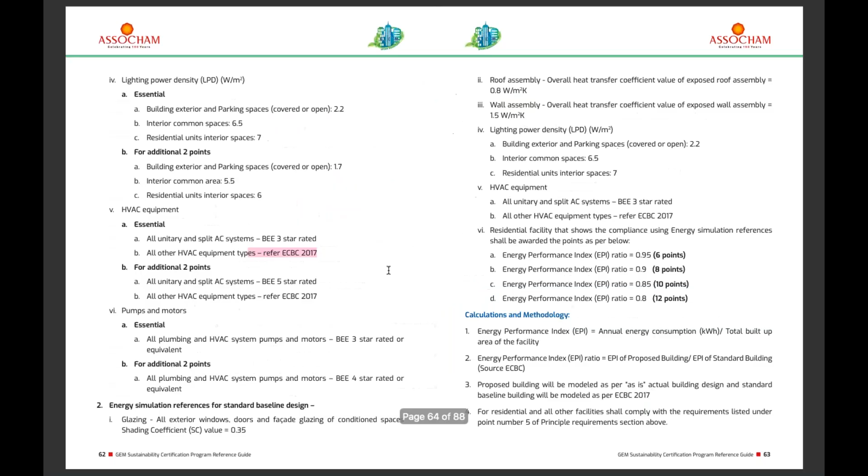Now coming back to GEM rating - this is all about natural light. So I explained how the manual calculation can be done, and in case your 40% of area is complying with 90% or more hours within a lux range of 100 to 2000, this is a mandatory requirement. In case 60% is meeting, then 2 points. In case 80% is meeting, then you will get 4 points.

It hasn't come yet, sir, you can just do it like that. I would like Neeraj sir, could you please mute your mic? Yes, okay, thanks.

Now the last section is air quality. So fresh air requires compliance with 62.1 2010. Basically, if your area is defined, your population is defined, and your system is defined - how the pressure system will be working - you can define how much air is required in a particular zone and accordingly in the whole building, and what pressure is required. There is 62.1 2010, table 6 is there. In table 6 you can find the requirement of fresh air according to area and according to persons.

Second point is outside fresh air requirement. Please note this, these questions may come anytime. In case you are applying for GEM exam, this question may come - what is the minimum requirement of filters. MERV 8 is the minimum requirement of filters. This is a type of filter rating: MERV 8, MERV 9, MERV 10, MERV 11, 12, 13, different types. The higher the rating, the gap between the filters will be very less.

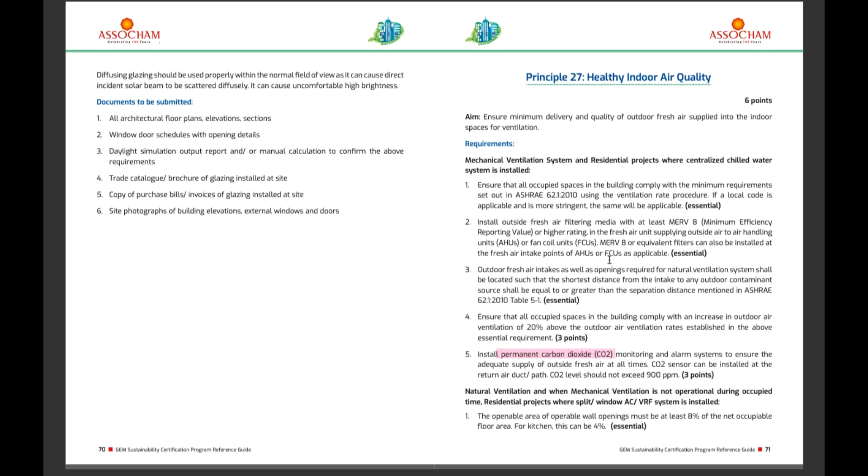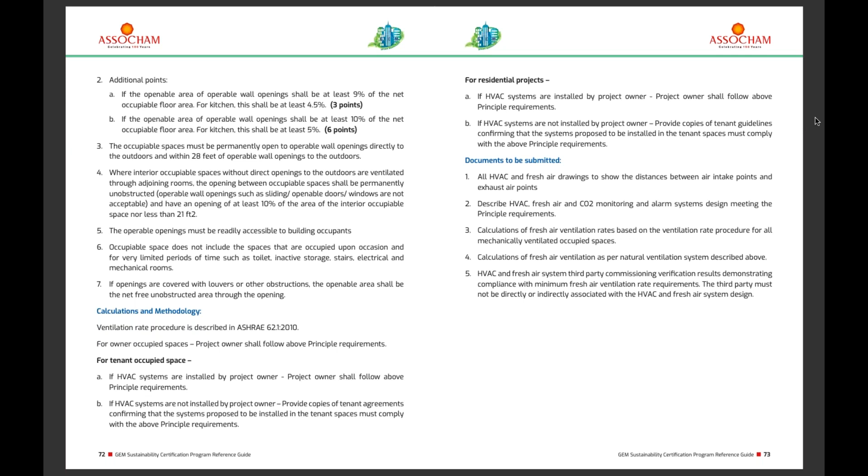So this was the basic requirement of fresh air as well. I think now I'm done with the basic understanding of ECBC energy requirement, daylight, and fresh air. So over to Mr. Neeraj Arora. I hope, sir, this will be sufficient for energy.

Thank you so much, Kishan. Your presentation was really wonderful. I think we should allow you one day to explain things the way you are explaining so nicely. Thank you, sir - because these 3 criteria, energy, daylight, and fresh air, these are complicated criteria.